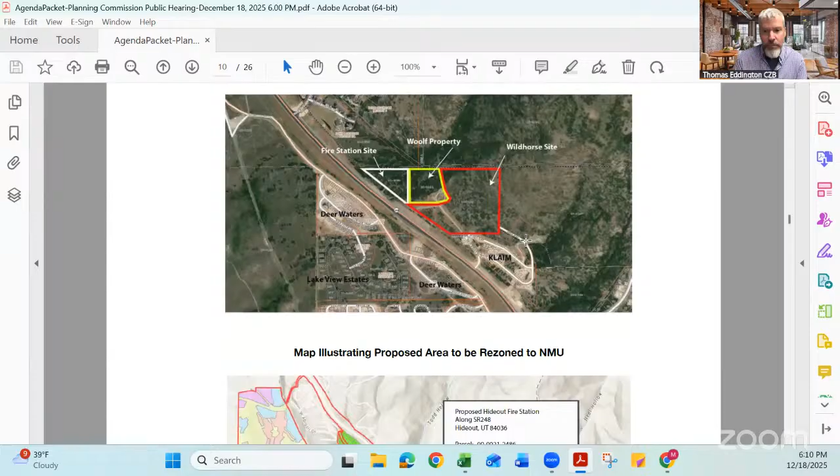If you go down just a little bit, you can see the site. You guys are probably very familiar with it by now. You can go down a little further, to the next page actually.

If we zone it NMU, neighborhood mixed use, it does list public services facility as a conditional use. So a fire station, a public works facility on maybe the south part of the triangle, if that materializes in the future, both would be conditional uses in an NMU. They would require a conditional use permit. So their site plan, their configuration layout, would still come back to you for approval, but they would be an allowed use subject to conditions that could mitigate any impacts. So the recommendation is NMU.

Is this project under the law that went into effect in January of 2025, where we'll get to see everything? And it won't go to council? Yes, you are correct. Conditional use permits only come to the planning commission and they don't go to council. So once the fire station comes in for the CUP, that will be presented to you, the planning commission, and you guys will have the final vote on that. After that, there is no additional stop. The conditional use permit is approved by the planning commission.

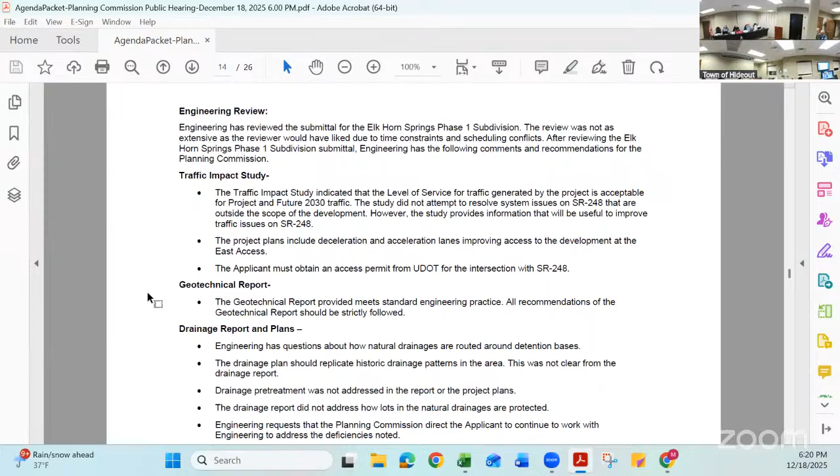Okay, because this is our first one, I just want to make sure that we're... make sure what's supposed to be included, what's not technically has to be included, etc. But should I let you continue, or should I keep asking my questions? No, whatever you prefer. I can give you a quick background for this subdivision if you want, and then if you have questions, that might be the right time, and then I can kind of walk you through as best an amateur engineer that I will play tonight can do in place of Dennis.

I'll walk you through very quickly. I think you guys are intimately familiar with the Elk Horn project, having just seen it a few months back, and then of course it went through town council for the rezone and the associated MDA.

So this is for phase 1 of Elk Horn. It's 8.971 acres. The zoning contained within this is R3 residential, R6 residential, and NMU, neighborhood mixed use, on that corner.

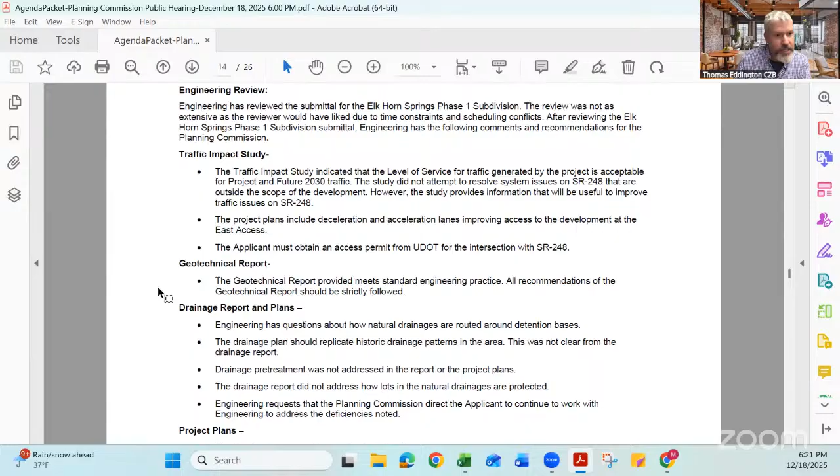If you're able to scroll down to the next report, Maria, it might be easier to go to the second page of my report. The aerial might help people visualize. You remember that area on the bottom right below the parking lot is the NMU area, reserved for commercial down the road.

Where is it? Can you give me annotation capability, Maria? Aren't those the black lines? No, not over there. Right there, that box. Go up, straight up, to the right. That little black box—go down, go left a little more, into the box. Right in the box, that's NMU.

That is the area that was reserved. If you remember, there were discussions early on about maybe a little more commercial to the left of what you see, incorporated around the pickleball court. As it moved through the process, there were questions about whether that was a good location for commercial. It went back and forth. Ultimately, Nate agreed to reserve some land for commercial—about 14,000 square feet, maybe increased slightly, which is where Maria's pointer is now. That is for Nate to develop commercial. If it doesn't develop as commercial, the MDA has a reversion clause so that land reverts to the town, and the town could try to collaborate with a partner to do commercial there or otherwise.

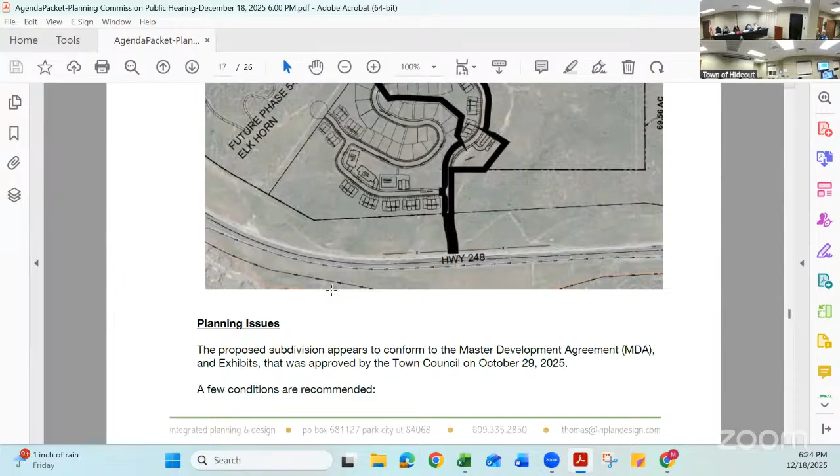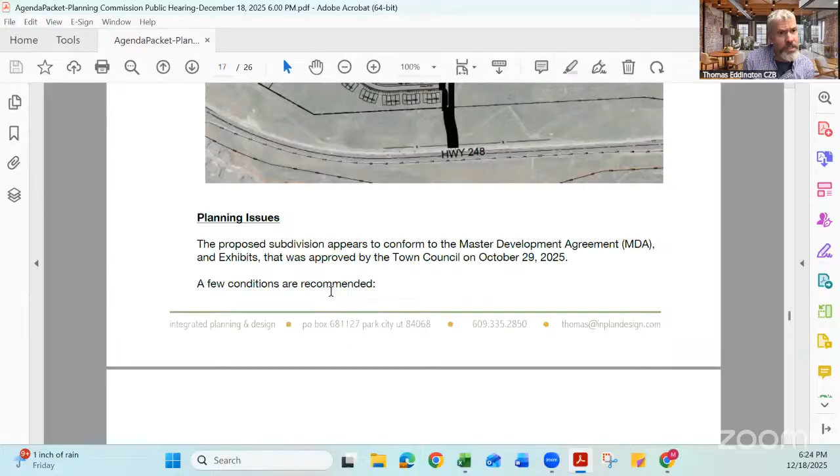This is the spine road that goes up—it's the emergency ingress/egress road for Golden Eagle, which would be improved as part of phase 1. There are also townhouses on the north, or west side, and some single family lots, in addition to the commercial area and the parking.

This meets exactly what we saw in the MDA deliverables. We had a few conditions we'd recommend: noting on the plat clearly where the stairways are located in this area, also noting the width of the stairways, possibly by way of a plat note, so any prospective buyers know what that open space is.

A note that the driveway serving each townhouse will be separated by landscaping so it's not all one concrete pad coming off the main spine road up to the top of this project. And then including the open space noted in Exhibit K of the MDA as native and undisturbed, meaning that land is not touched and remains undisturbed. Other than that, from a planning perspective, this is in compliance with the MDA and the rezone.

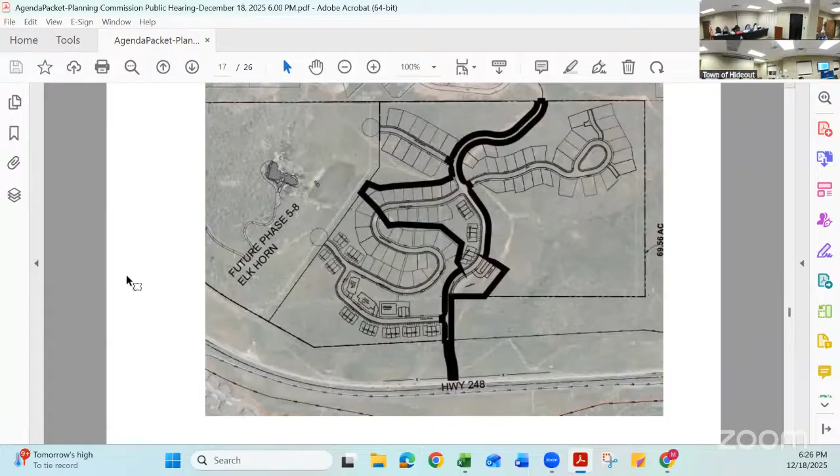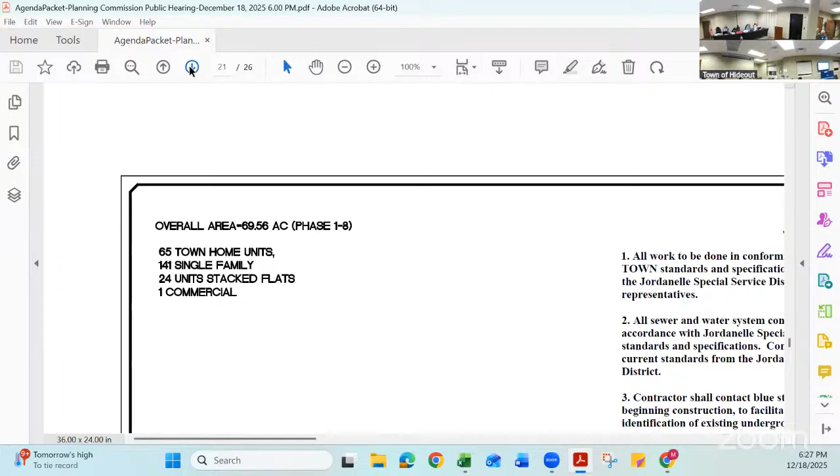I have a question just looking at page 22 of the packet. Where this road connects next to the Mustang development going out towards 248, it's half a road, it looks like the road's cut off about 10 feet - the width of the road is cut off. Are you going around the Mustang development? And are you proposing that the road be narrower at the exit?

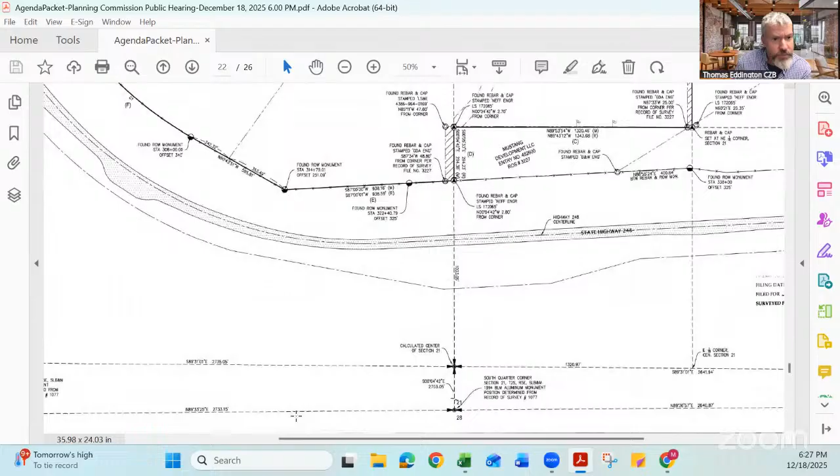Our entrance - Maria, stop right there and scroll down just a little bit. Actually, the other way, sorry. Look on slide 26. You could kind of see at the top of the screen, is that what you're talking about, Joel? Right dead center of the screen, where the cross hatching is. Yeah, if you go to slide 26, it shows you there, that's better.

It's 10 feet short on Mustang. Oh yeah, like that was about... go ahead. Really?

So the asphalt is exactly the same, and on our side of the road we've given the right of way. So we're proposing that Bob gives his portion - we've given our right of way all the way over to Bob's property, and when Bob comes in and develops, he would give his. We're giving up to the curb and gutter, then he would give after the curb and gutter the public utility easement, which is either 6 or 10 feet. The asphalt meets your guys's requirements, but there would be no easement on that side until Mustang wanted to develop.

So the sewer must be on the other side? Sewer's in the road - in the middle of the road. I don't know if it's actually in the middle, but it's in the road. Okay.

Is that maybe what Dennis was talking about under his concerns with the roadways? I have not seen the report, but we've met with Dennis several times, and this is the conclusion he thought would be best. Do we need to have him waive it?

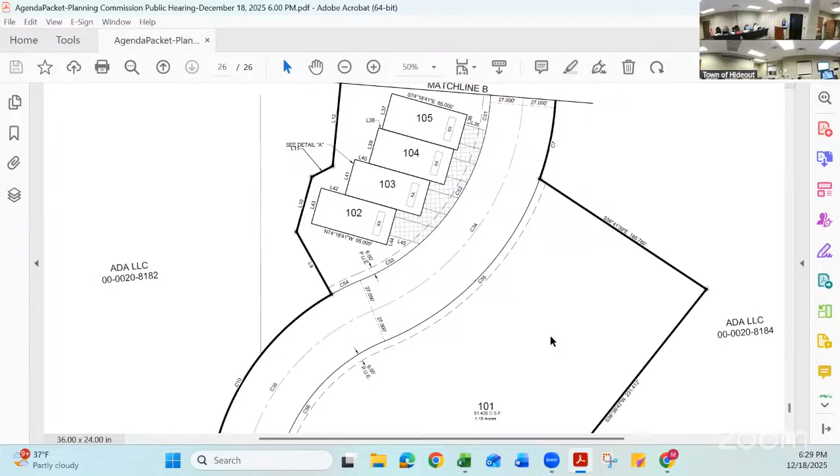He said he didn't get the report, the staff reports. Did you not receive them or just not have a chance to look at them? I received them, I didn't see them. It's fine, I've talked with Dennis and Thomas several times about this. So you have a right to have it - no, we need to get to a vote tonight, so that's fine, I waive whatever rights I have. Sorry, just a technicality. It's all fine, no, this is great.

We've worked with staff, Thomas and Dennis, for the last month. We turned this in on the 19th of November, and we've been working with them since. Our understanding is you guys would vote on this, and then we'd go back and fix anything with staff that they wanted fixed. So I really didn't even think there was a staff report, and I'm not concerned about it because we'll address that over the next couple months before we record the plat, if we get a positive recommendation.

The rest of the roadway is 27 and 27, and 54. And remind me what I get for the 54 feet? Paul, how many - you mean asphalt? Yes, how many feet of asphalt in the 54 feet? Yeah, we're basically building the whole road, including curb and gutter on both sides.

The only thing we're missing is the side treatment on Bob Martino's side. But the question is, how many feet of asphalt did they get for the 54-foot right of way? Oh, give me 2 seconds and I can answer that. We're following the city standard. I just couldn't remember. And the reason is, because it looks like all the driveways to the little townhomes are short - it's 30 feet of asphalt. Yes, 30 feet of asphalt.

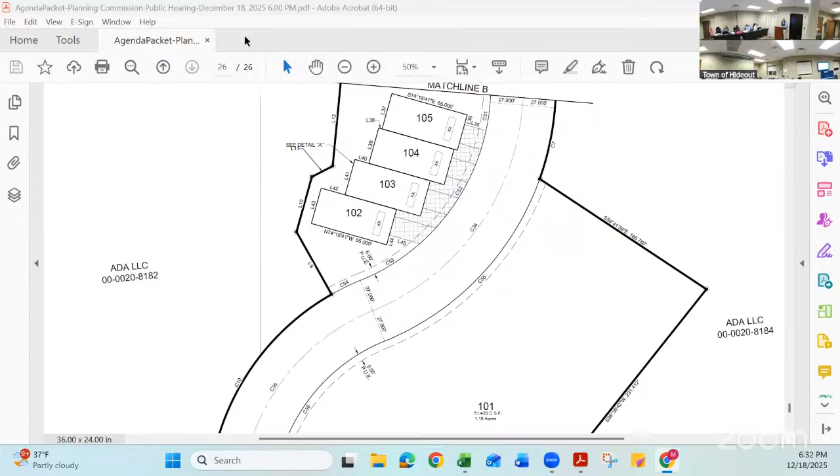If you scroll down to page U-1, you'll see all the stuff that answers the questions you've been asking about where the sewer line is, where the curb and gutter is. We don't know. Yeah, we don't have to.

Paul, is there any concern? What sheet page is that again? There's like 70 pages in this set of drawings, and it's called page U-1. Do you have it up by chance? I've got it up on my screen. Maria, can he share?

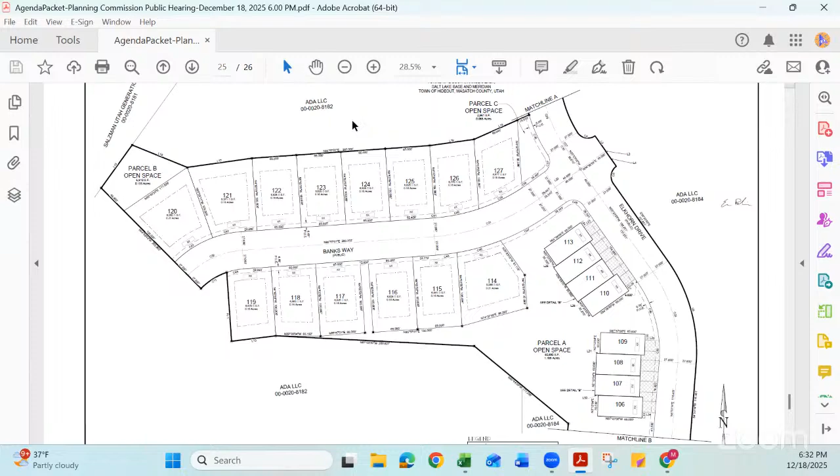State law says you have to have center line of road plus 10 feet. Yeah, so we're going beyond that. Okay, keep that in mind. We're kind of having side conversations, but for the sake of the minutes and the recording, if we can just take turns. Go ahead, Paul, I know it's hard because you're not in the room.

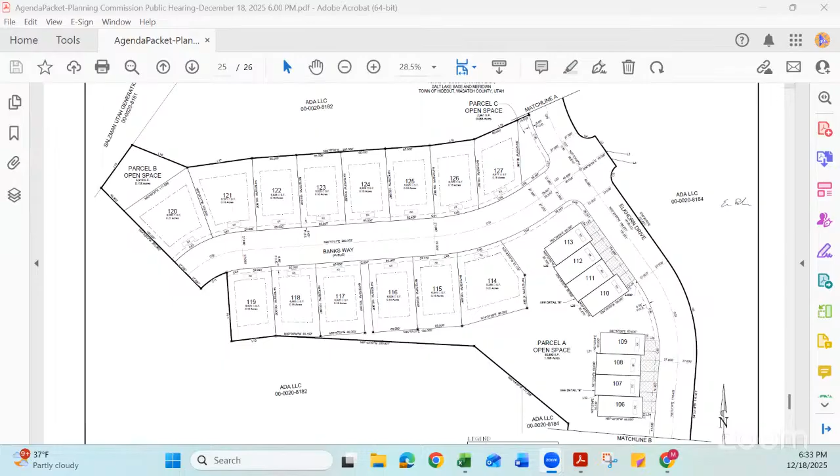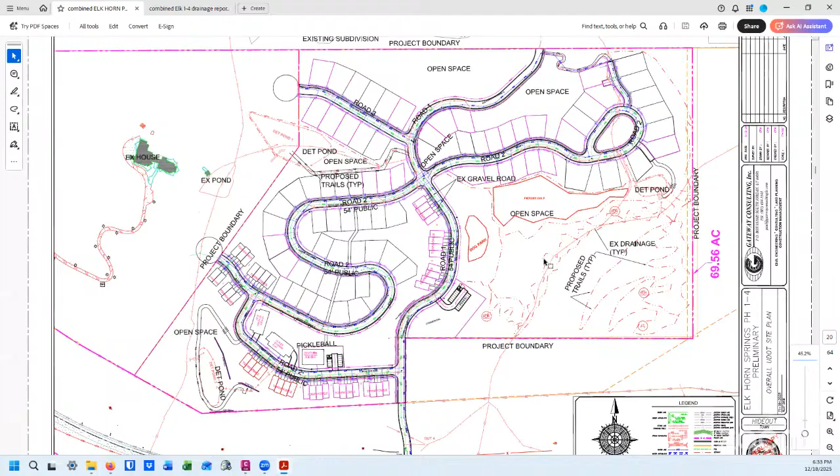Okay, so this is page U-1. Like I said, there's about 70 pages in this whole set of drawings. So let me scroll down. Here's the sewer in green coming down to the road. Black is your curb and gutter. Pink is your property line. So we're building curb and gutter, all the asphalt, curb and gutter, the trail, the dry utilities, everything else on the other side. The only thing not being built here is the side treatment, but you really don't have any side treatment over here anyway, so it's going to look just the same.

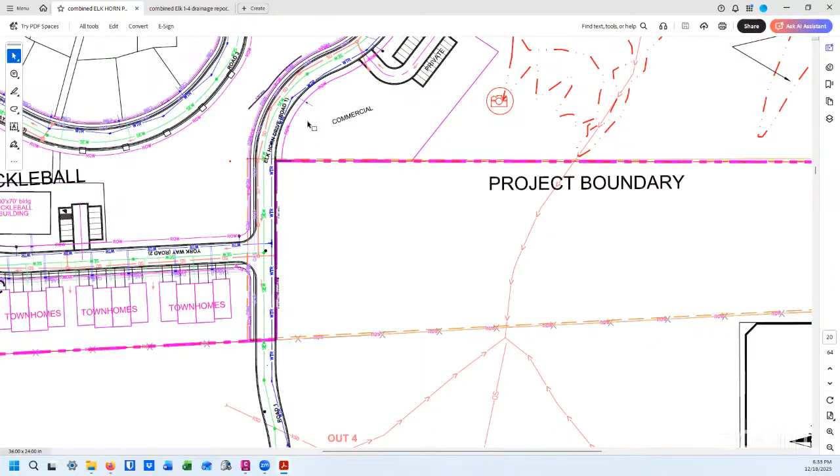How far is that first house from the street? Okay, so I'm going to stop sharing and pull up my other screen then. Let's see, the right of way or from the asphalt.

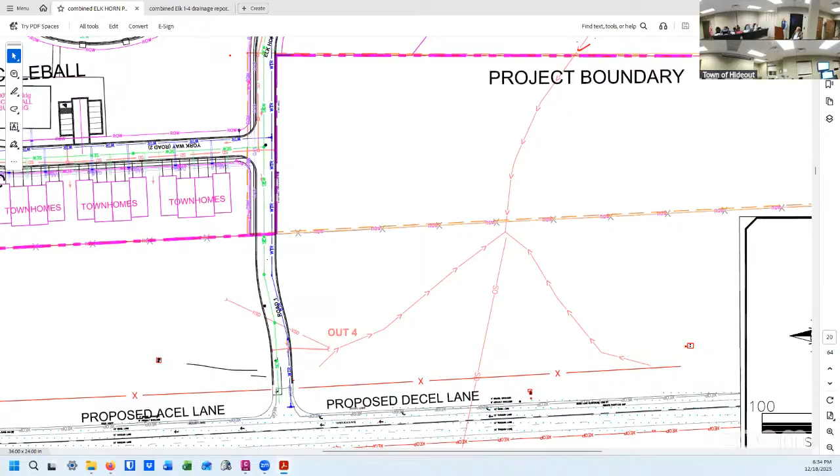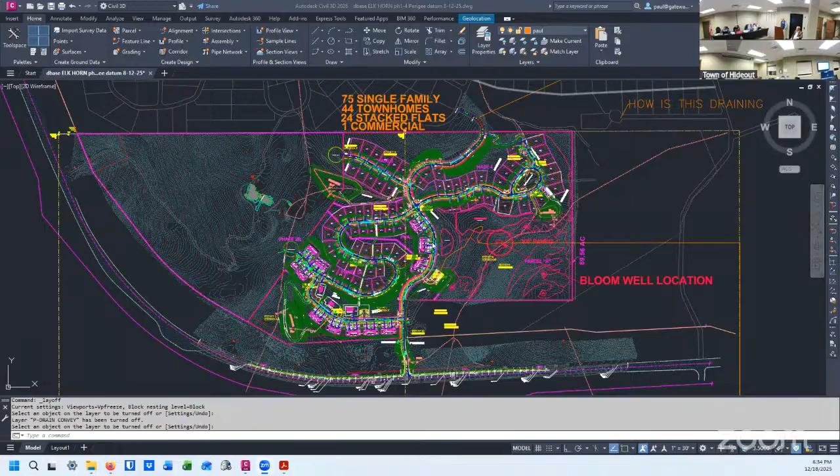You're talking from 248? Is that what you mean, 248? No, I meant the entrance. He just showed the houses. Right there, right there. But that's not part of phase one. He should have been, he was just showing the overall. Yeah, I just want to make sure about the road. I guess we can address it in the staking if they're too close.

Okay, so here is my CAD file. Now ask the question again. How close is the house to the road here? I can't see anything. And we can't see your file. It's phase two.

It's phase two, didn't she realize it was phase two she was concerned about? Can you see my screen now? No, not yet. I can. It took a little while. We see you, Thomas, but we don't see your screen.

Took a while, but if I'm answering the right question, the back of the townhomes to the edge of asphalt is about 320 feet to the UDOT asphalt.

Oh yeah, I think we got a little confused, because we're talking about phase two here. We don't need to worry about it, we're just on phase one, so that'll be a next end of the year type deal. Hopefully.

Okay Paul, can I ask one question? Yes. Is there any concern about the road going right up to the property line of the Mustang development? I have no idea, is there any legal concern of putting that road right up against it? No, I don't think that our code requires any setbacks for the roads. Are you talking about what's going to be the main kind of road all the way up?

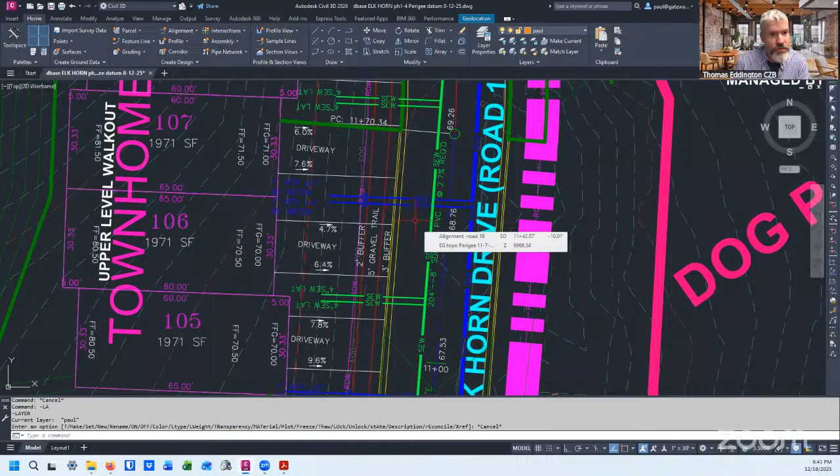That's a good question, but I think Nate is right. Every road has a trail, a crushed granite trail on one side of the road that's 5 feet wide at minimum. And there are cross trails throughout the property and some stairwells that go between different lots for connectivity.

The stairway, you can see it on here right now. It's between the 3 lots on the bottom part of the road. So that'll just be stairway and takes you down to the main park and everything. I know there was a question about how wide it is - we decided that was 20 feet. It said 12. No, it's 12. That's 12.

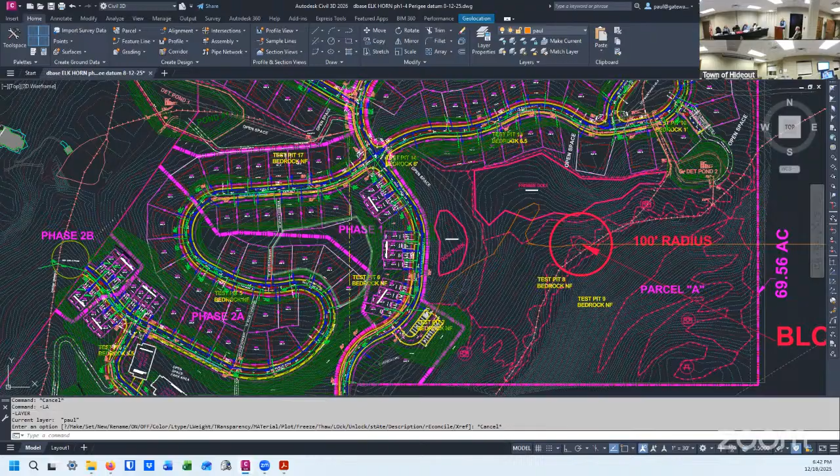Sorry, the stairway - yeah, it's in the development agreement, and the stairway is 12 feet wide. Dennis just asked that it be called out as a note on the plat. So like I said, if we get approved tonight, we'll work with staff to get all their recommendations done before they sign off on the final. We're just hoping to get it through tonight, and then we'll get all those things fixed, or whatever they want to see on the plat.

And just for clarification, with regard to this stairway, it's 12 feet of common area width, and the stairway itself will probably be like 5 or 6 feet wide, or whatever we end up accepting.

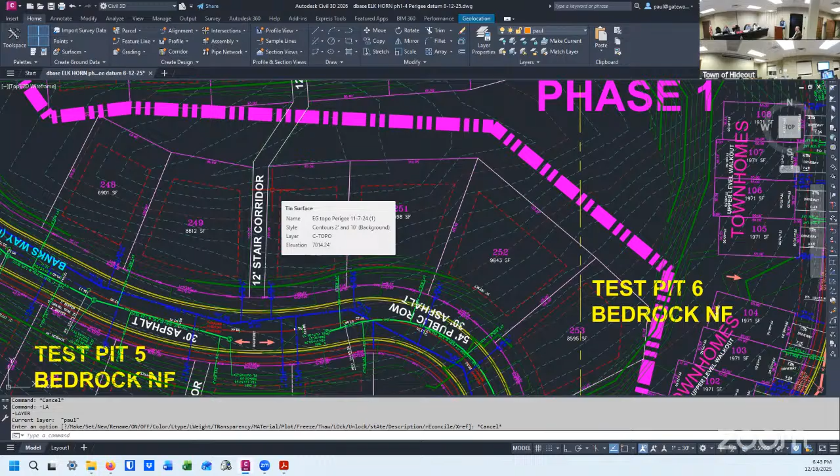I have a quick question since I think Brad mentioned the stop signs. Where does it come into play if we feel the need for stop signs, or somebody feels the need for stop signs? Is that with administration, not planning commission? If you guys have a recommendation, you can certainly make it, but ultimately that would be at time of the town engineer reviewing the final subdivision. That's not your last shot at that issue though - if there is an issue that the town engineer or the council observes once a project is developed, they can certainly request further exploration and signage if needed.

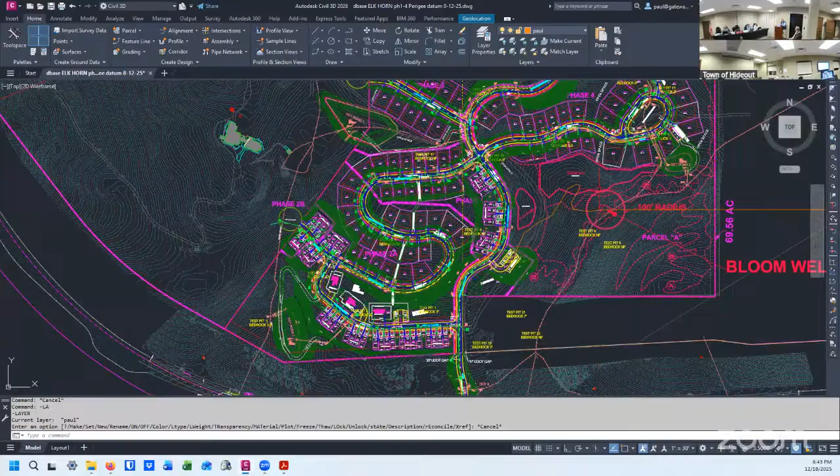Just for example, we added a sign in Deer Waters 4 years later - we got a sign up there probably 4 months ago because someone said this needs to be a stop sign. We did that. In Deer Springs, there was a blind spot, so I had my son, who just started a construction company, come up and we cut that down about 8 feet. Some developers won't do it, but I'll do it every single time and come fix those things we're not aware of.

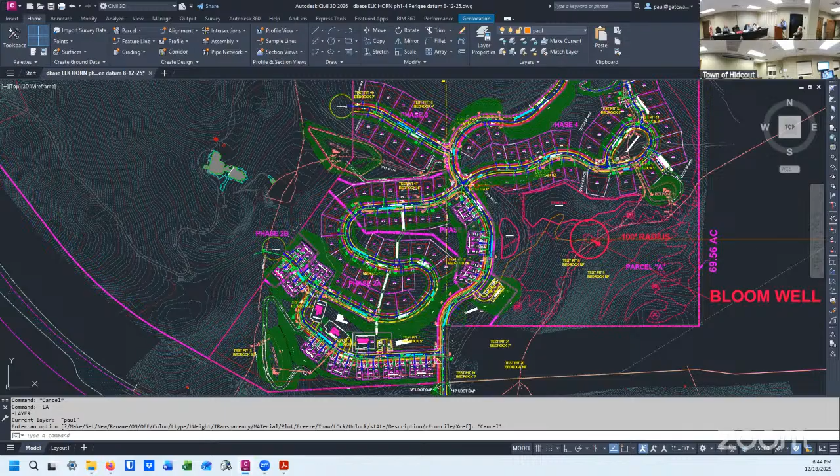There may be a traffic sign or something you guys want to see. You have my word on that, and I believe that you'll do it. I just needed clarification as to when, where, and who handles this.

With this new code, the state code, this is my first time coming to you guys one time and not going to town council. I kind of like it because town council likes to go till like 11 o'clock at night, but mostly because of my stuff. So this is the change that's been made and we live by it.

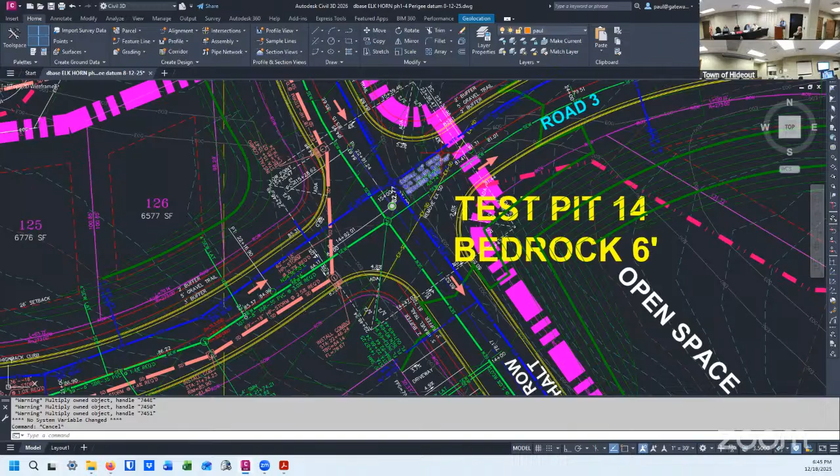I can show you all the stop signs if you want. The short answer is any of the roads coming into the spine road has a stop sign, but as of right now, the spine road is continuous drive-through. If you want me to add more stop signs, like at this intersection, and add 2 more at this intersection and have them stop, I'm glad to do that.

I don't know if it'd be smart to put in speed bumps. Since you're going to have all the construction ending up going down that spine road, those people in the townhomes are going to have a lot of dump trucks go by or whatever. I know Bob Martino does not want to use the spine road, even though that's his second access.

So maybe it won't be as busy as we think. Does the speed limit, when does it get established? Are you talking about the sign? No, the actual speed limit. Like, how do you know?

Whatever your code is. We're following the code right now for a 30-mile design speed, but if you want me to drop it down to 20, I'm glad to do that.

Then you have to look at the code. He said it's 25, but he's happy to drop it to 20. Oh, I think he said 30. I think it's just 30. I think it's 30 right now, but Paul, you said you'd drop it if requested. Yeah, if you guys want it dropped, I'd be really happy to drop it. Yes, please.

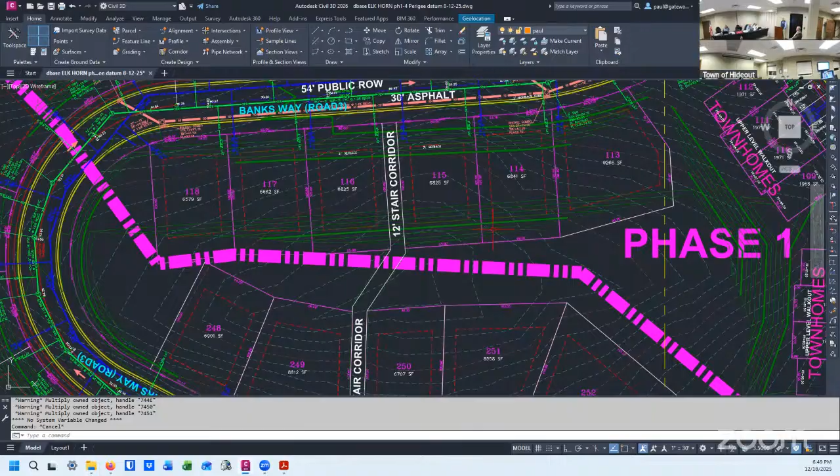That's how I've got it platted, as open space. So this is the same as all of this. You are correct, Brad, and you are correct, Paul. It doesn't need to be dedicated specifically as an easement.

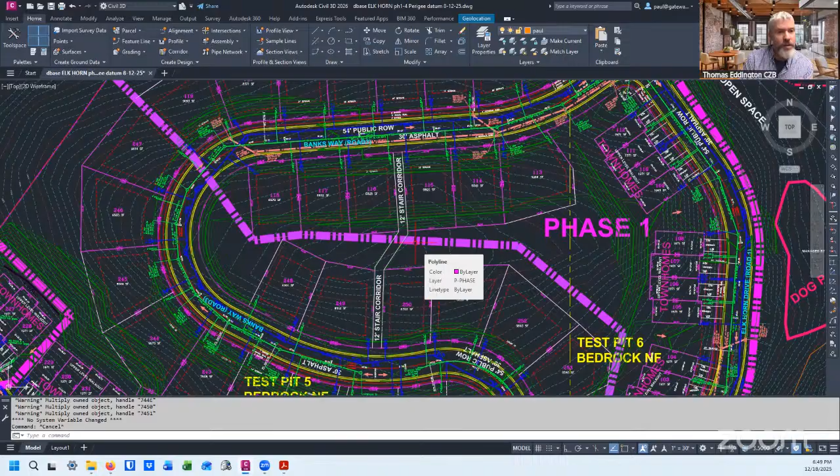Typically, what we do with the open space on the plats is require the open space be dedicated as public utility easements, or I'm sorry, public access easements for trails, depending where they may go. So that typically gets incorporated into the open space so that there is flexibility to move them if needed. I'm happy to add that in there if that's what you want. And that's typically what we've done in Lakeview and in the other subdivisions, just so that if the trail moves, the public has the right to access it.

Okay. Well, who will hold the open space? Will it be the HOA? Yes, the HOA.

Is there going to be one HOA? Yes. For the whole phase, or just one? The whole thing.

There's one caveat to that: under Utah law, condominiums have to have their own HOA. We do have stacks of flats, so you'll have a separate HOA for those. They'll be their own HOA by statute. Will they also be part of the development HOA, or will they be totally independent? They'll just be their own now. You could have joint use agreements if you're sharing some amenity, but by state law they have to be separate.

Why don't you stand up and introduce yourself? I don't know, you guys know Eric?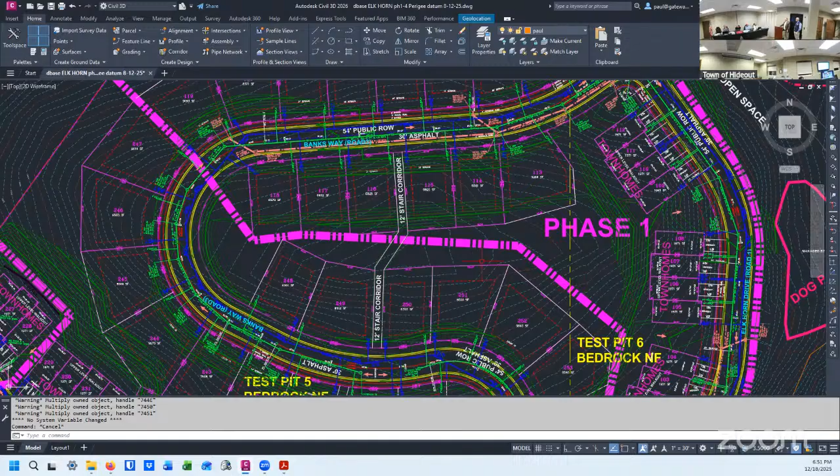My name is Eric Davenport, I'm general counsel for Home Zones. Utah code has an entire section on condominiums, and HOAs relate to condominiums differently. The property is held differently than a townhome. Condominium owners all own an indivisible share of the common area, typically based upon the number of units or the square footage of their units. Whereas with a townhome association, the actual homeowners association will own the common area.

They're going to use the pickleball courts and so on. What you'd typically do in that situation is have a joint use agreement between the condominium association and the townhome association. We do it all the time, working out the costs—say we have 30 members and you have 10, so we'll pay three-quarters of it, you pay that. I think that's in our phase 3 or 4, I don't remember, but it's down the road a little bit on those.

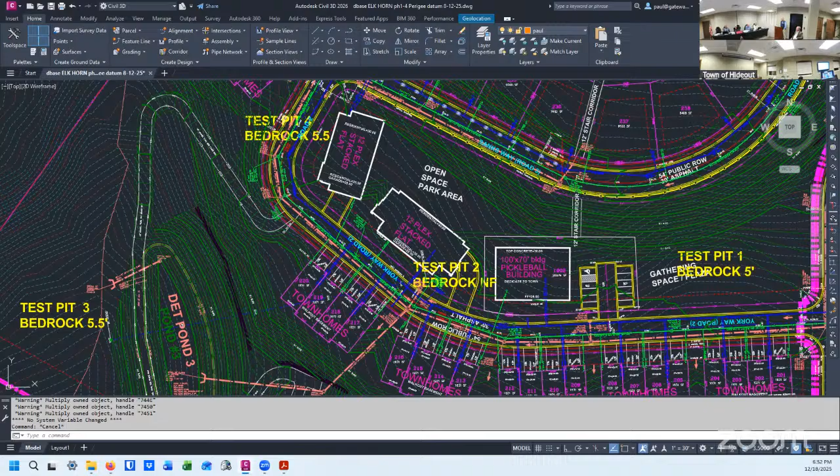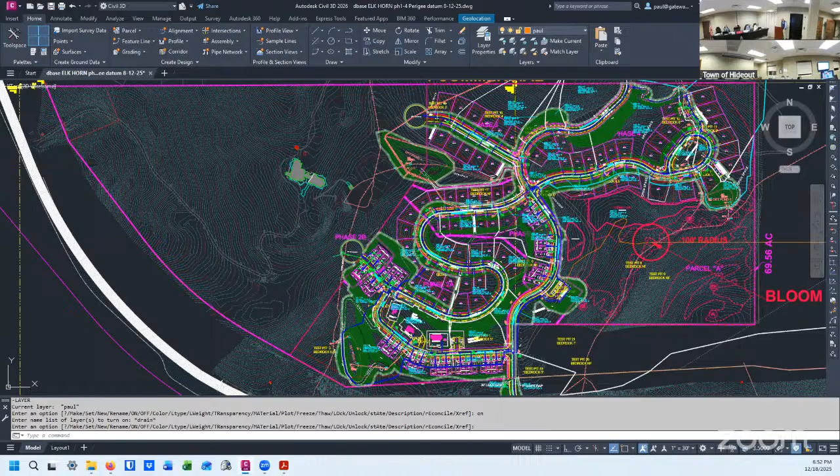There were a couple items in the report, if you didn't see it, that I want to bring to your attention. Engineering had questions about natural drainages—the drainage plan should replicate historic drainage patterns in the area. Paul, will you address that? Also, drainage pre-treatment wasn't addressed in the report or project plans, and the drainage report didn't address how lots and natural drainages are protected. Our engineering team asked that we ask you to continue working with engineering to address these deficiencies.

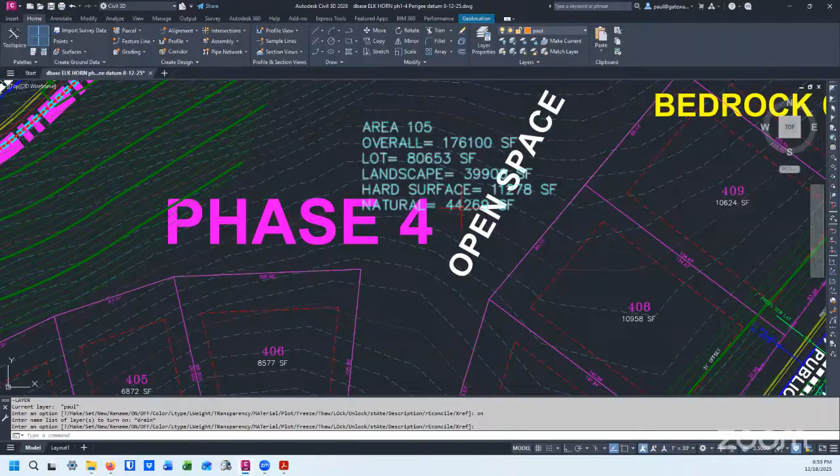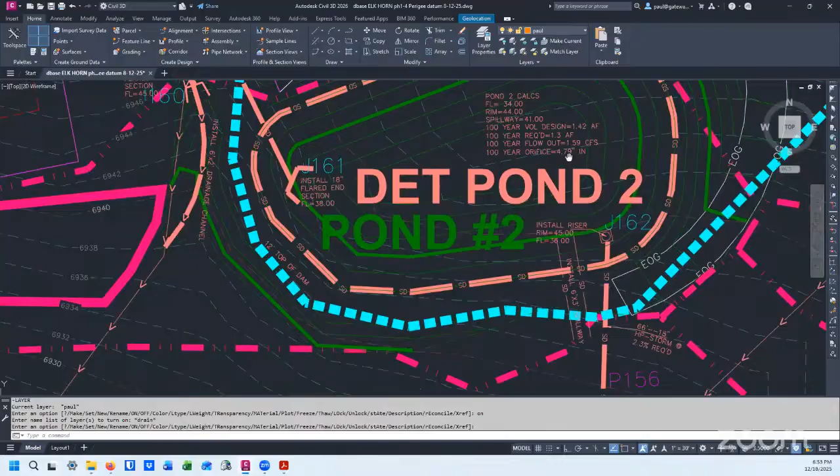Yeah, I'm happy to work with them. Basically, all of our hard surface area—roads and everything else—goes into our detention basin. Out of every catch basin we have, we calculate a drainage area: how much is landscape, how much is hard surface, how much is natural, and so on. Everything we're generating runs through the detention basins, so our pre-treatment happens there, and the historical flows are just routed around us through a channel. We're not dumping any of our stuff in until after it's been treated for 24 hours, so you'll see these orifices that are really small, 4.79 inches.

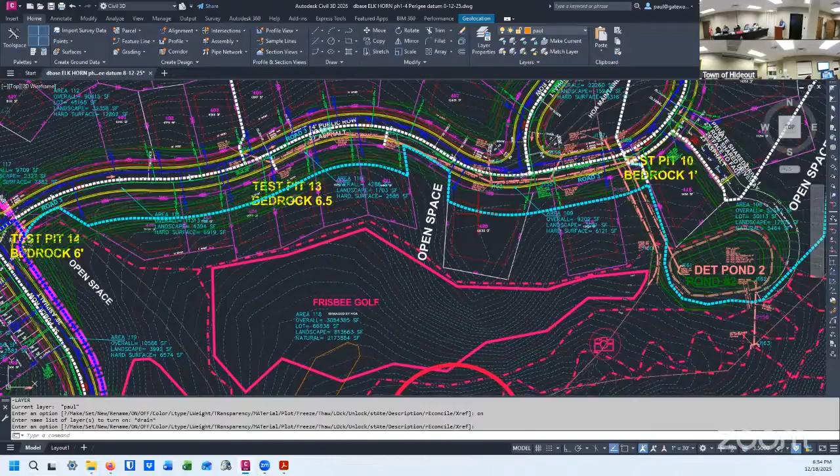Paul, are you sharing your screen? I believe I am. Mine says I'm sharing. Maria, I think you might need to click the top tab that says Paul's screen on your Zoom, because you might just be seeing what you were sharing. Do you see that? There's a tab at the top of your Zoom screen, green and red. Oh right here, sorry, yeah. I'm toggling my own tabs so I can see it, but I don't think you guys are seeing the right screen. There it is, see it? Sorry about that, thank you.

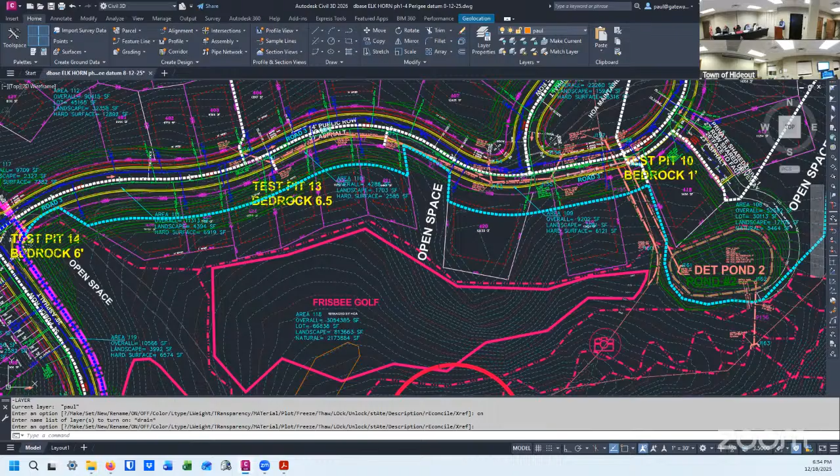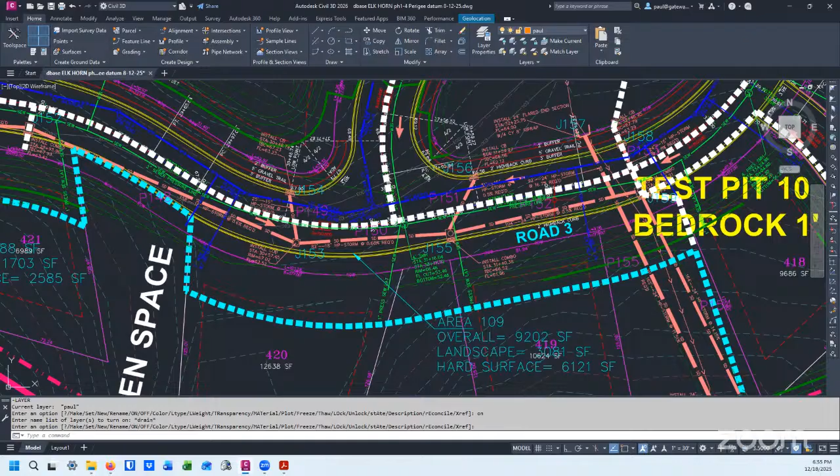Why don't you start over, because this is important with the drainage. Okay, so every drainage area or catch basin has a drainage area that we figure out—overall square footage, how much is landscape area, how much is hard surface area. We size all of our pipes to handle a 100-year storm at 80% capacity, so we're above what they require. Out of all those hard surface areas, we run it through a HEC model and then through our detention basin.

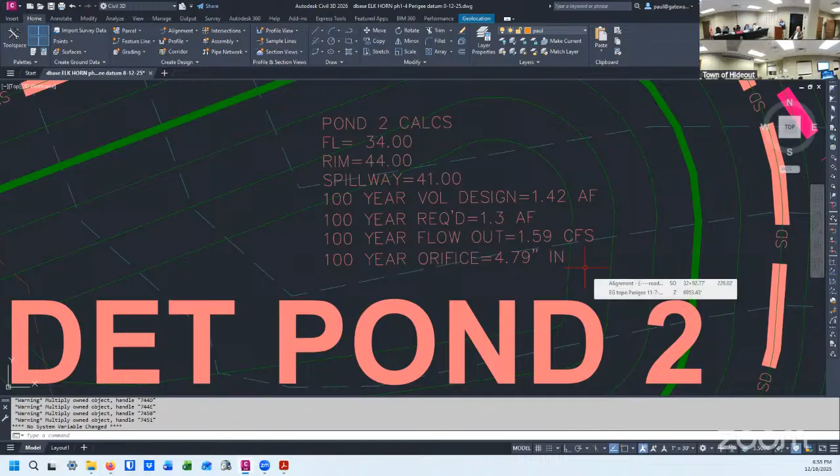So our pre-treatment is done in the detention basin. We hold our entire subdivision's runoff in the detention basin for 24 hours and let it go. That's why our orifices are so small. The entire drainage area goes into this basin, but I only have a 4.79 inch orifice to allow it out. That allows the silts to separate out over 24 hours. I could go over all this with Dennis as well, but just so you know, your question was whether we're dumping water into the existing drainages that are there now - not until it goes through our pond and gets cleaned up, and then it goes into it. Yes.

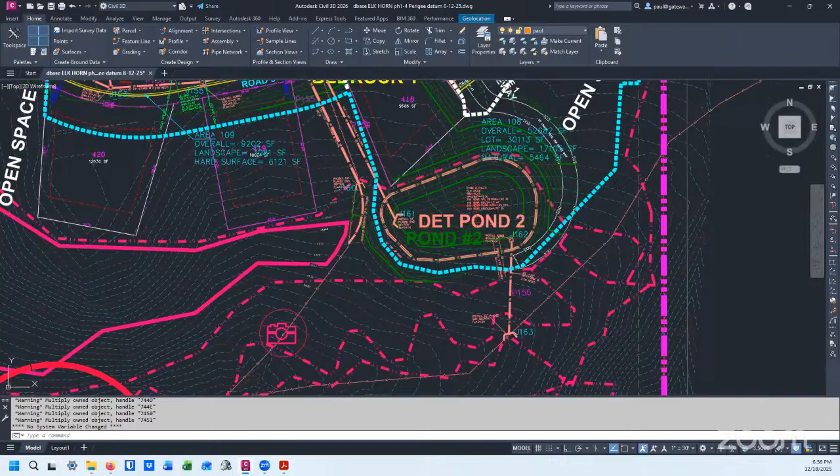So if you had 10 CFS going into this drainage channel before, we have like 0.1 CFS because we throttle everything down as part of the Clean Water Act. And then, like I said, it's released over 24 hours. So a storm comes through and it's already passed way before any of my water is really going into this channel.

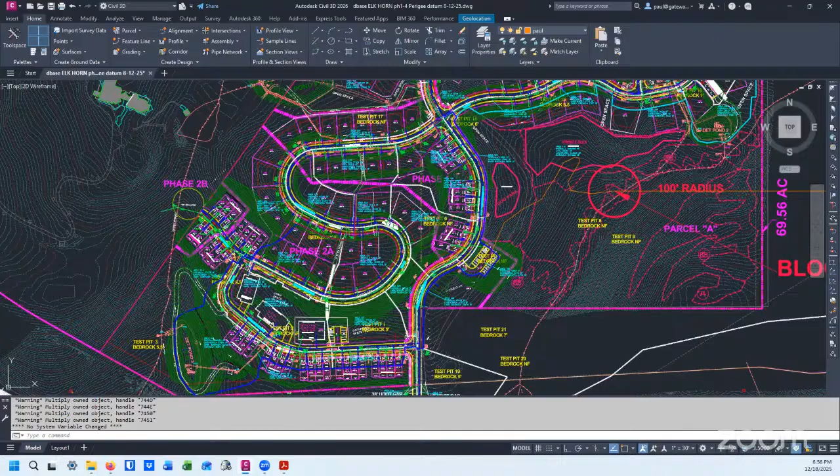Paul, will you have a detention pond built as part of phase one? We have to build a lot of the detention basins because our detention basin on phase one is way over here, so we have a lot of offsite stuff in phase one. Our phase one comes down the road, but yeah, we have to build our detention basins. So it goes, phase over to one - that left, it goes over to that left pond.

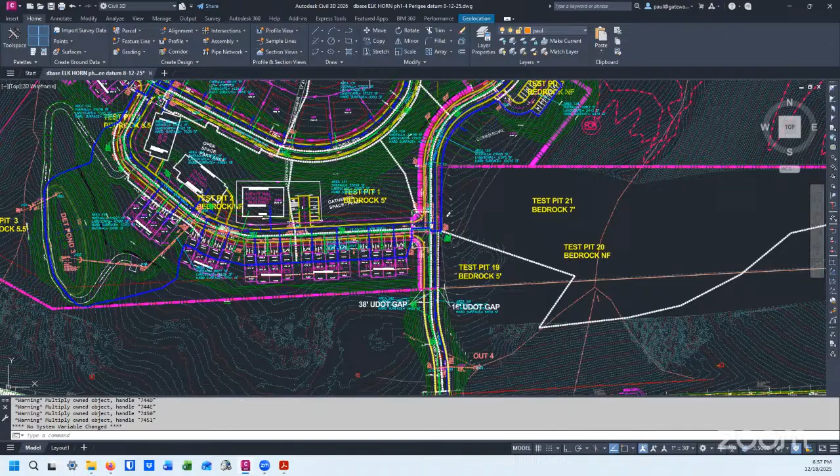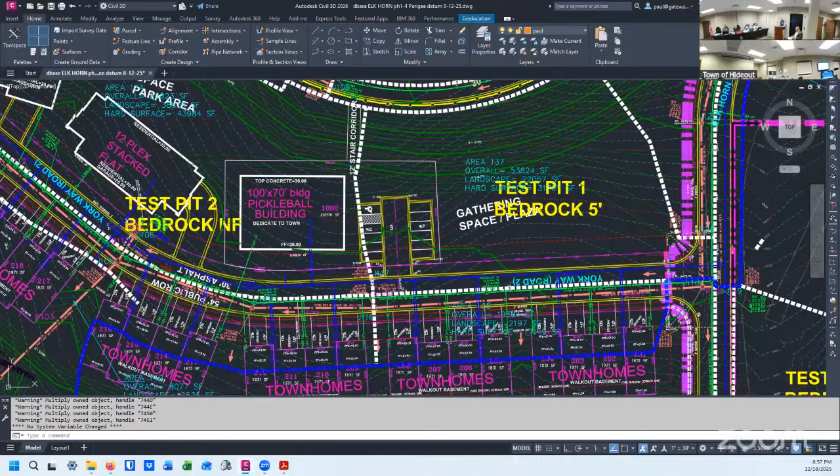One of the things we'll want to do then is make sure you guys provide us a plan that shows the estimated limits of disturbance, because it'll be outside of phase one, what's illustrated on the subdivision, right? Because that's well outside of phase one, right? Yes, phase one is this pink line right through here, this thick line. So we would want to see that, and we would want to see the limits of disturbance kept as de minimis as they can until that phase comes through for construction.

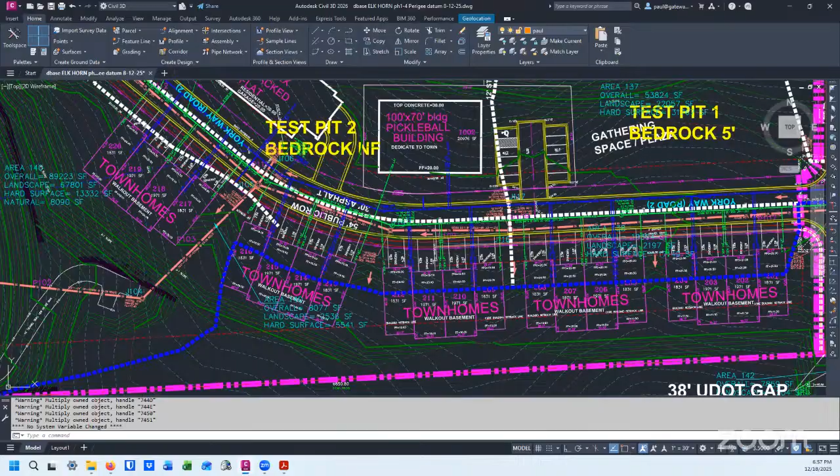Does that make sense? Yes, but we want to put the pipe in only once, so we've got the elevations and where everything goes. So I agree, we want to keep the disturbance as little as possible until a future phase. Right, but we don't want to be building multiple detention basins and then moving them when another phase comes online.

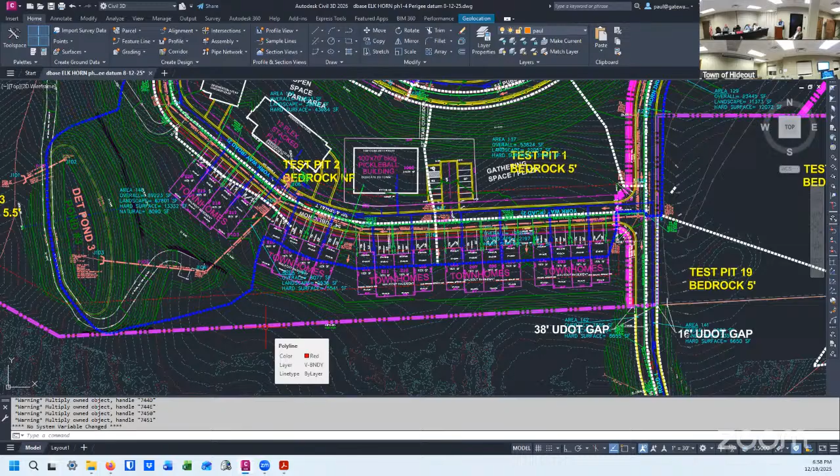No, that makes sense. Well Paul, when you turned in your limits of disturbance, was that included in that? Do they already have that in their packet to Dennis? I believe it did. Okay. And did you, Paul, get Dennis's staff review?

I did not. So one of the things I think I should do is maybe share my screen, or Maria, you go back to yours, because I do want to walk through a couple of things that Dennis did ask me to share with you all. Maria, can you pull up the packet again? Just so that you guys see his report - you probably have it in your email or the link, but just so you're aware.

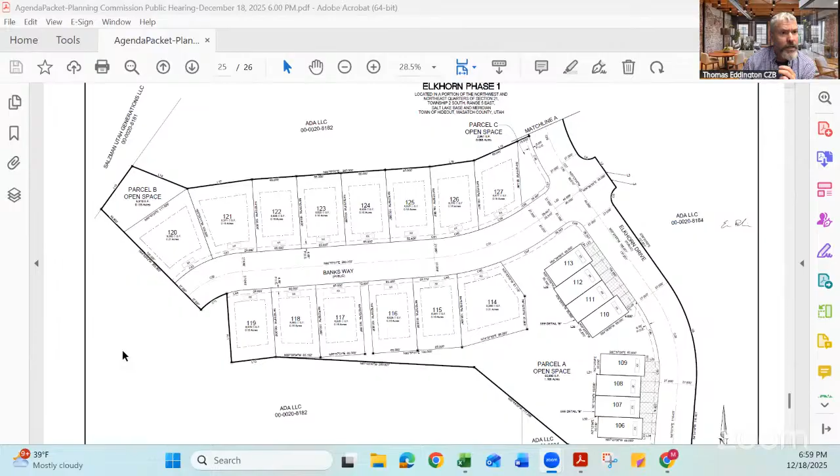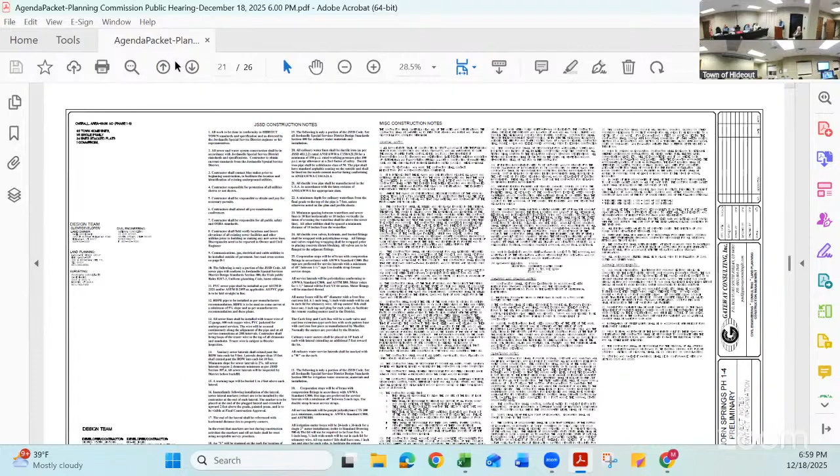Okay, if you can scroll up, it'll be at the top of my report. You've probably got another 10 pages to go. Let's see if I know what page it's on. I can share my report if you guys want to see that now. It's right there, Maria, if you zoom in there. That's just what I was reading - yeah, that's what Joel read out. So Joel read the drainage - the bolded text says drainage report and plans.

So we definitely want to make sure you work through that in detail to the town engineer's satisfaction for the drainage report. And the top one, traffic impact study - the applicant must obtain an access permit from UDOT for the intersection with 248.

And again, everybody understands this is a right out and a right in only, right? Everybody understands that is how this intersection will work until the light goes in up at Golden Eagle Road, at which point they'll be able to make a U-turn, but it'll still be right in, right out. It'll just be an easier opportunity for them to get into this development.

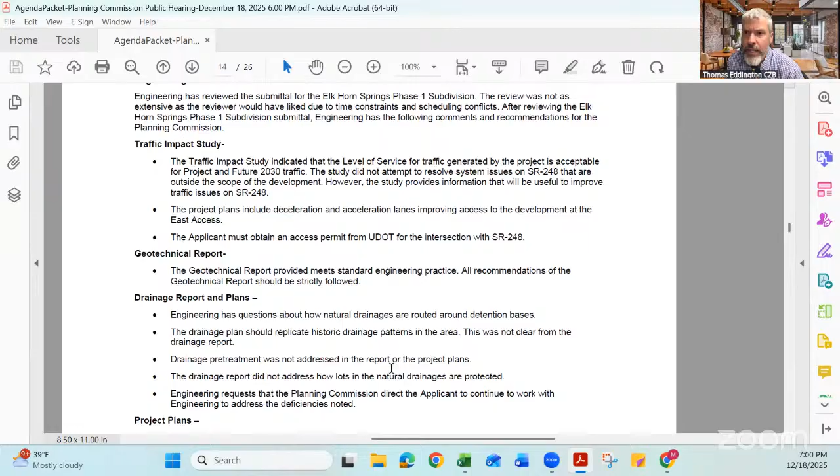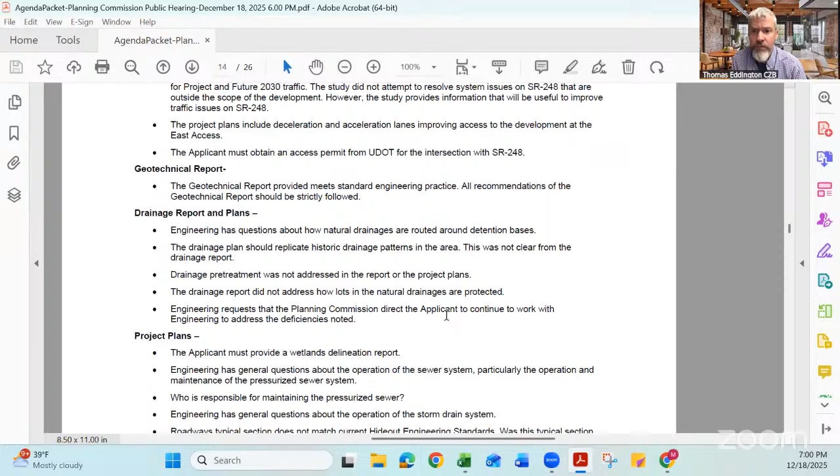Dennis noted that the geotech report met engineering practice. Then there were a couple of items he noted at the bottom where it says project plans - some additional material must be provided, a wetlands delineation report.

There were some questions that Dennis had about the operation of the sewer system that need to be resolved to his satisfaction. He questioned who's responsible for maintaining the pressurized sewer. Do you guys know? It's going to be JSSD, I believe. Okay, confirm that with him.

He had a couple more questions about the storm drain systems, and he noted that the roadway's typical section did not match current Hideout Engineering Standards. Was this typical section approved by the town and by the prior town engineer? I think this does meet the alternative standard, I think. So we'll want to confirm that with him.

I was thinking that was the entrance adjacent to the property line. I'm not sure what that is. I believe we are following the city standard for the roads. We have the two standards, and I thought you were following the alternative, but we can confirm that with him to ensure compliance.

And then as Joel noted, there was just a request to continue to work with the engineer based on the planning commission's direction to do so as a condition of approval.

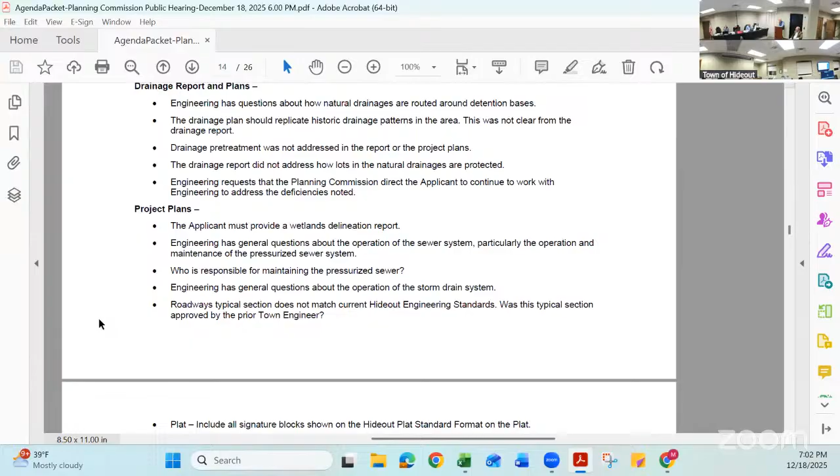Under the traffic impact study, that second bullet, the project plans include deceleration and acceleration lanes improving access, but I thought UDOT didn't give approval for that. Well, we will have approval for the accel-decel lane. What we do not have approval for is a left turn into it or out of it. So if you're driving west, you'll hit a decel lane and turn into the subdivision. Once you leave the subdivision, you'll turn right and have an accel lane to merge with traffic.

So even when the light goes in at Golden Eagle, people eastbound on 248 will still have to go up to Golden Eagle, stop at the light, make a U-turn, and then come back in. They still can't turn left into this main road, but they can turn left out of it once the light goes in - out of Golden Eagle, but not out of ours.

Now our second access, we're still working with UDOT on that, and that's our phase 4, 5 - that's five years down the road, but we're working on that now. That may be different at the existing driveway. We're hoping that gets a right in, right out, and left in. We hope all that, but we don't know that for sure.

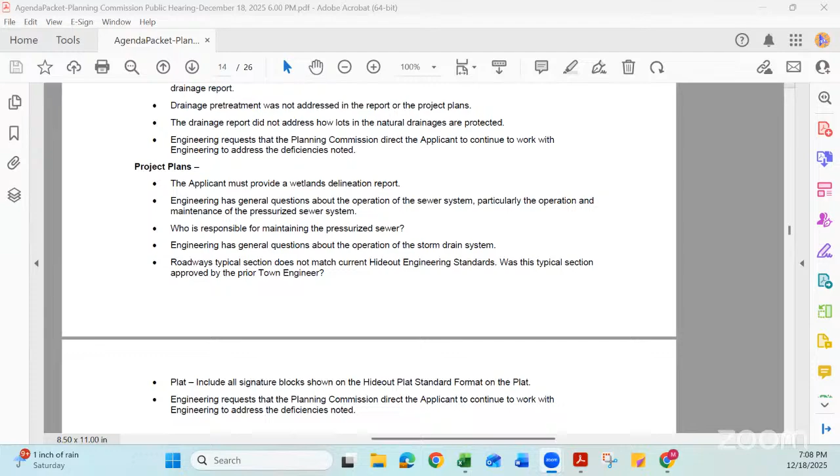And is that on the west side of your spine? Or east side? No, it's on the east side, a small piece on the east side in phase 1? Yes. Yeah, so we'll build a parking lot. The parking lot for now will be used for trails, dog park trails, but if we actually build something—say I have a restaurant that wants to come in—there's some nice views there, you can see it from the highway. That's why we decided to put it over there.

So if we can get a restaurant there, we may have to expand the commercial piece and the parking lot. We want to make sure we have enough parking for the trails, dog park, and the commercial piece. So that would be something we'd bring back to you once we know who's gonna go there.

You know, the commercial is much better after it gets built out up there, and Golden Eagle gets built out, Soaring Hawk gets built out, and Tuhaye continues to get built out. That's when that commercial piece is gonna be good. I don't know that I'll be building that in 5 years, but if someone comes in, we'll have signs up there, we'll advertise it, put it with a commercial agent. If we can get someone in there, we'll build it. If not, we will give it over to the town, and that piece will just get better over time with more homes being sold.

I promised last question, because none of our drawings show it: guest parking spots for the houses. Paul, will you address that? Ask that question again. What is how many guest parking spots do you have for the area if you exclude the commercial? Well, so for example, every townhome has 2 in the garage, 2 in front of the garage.

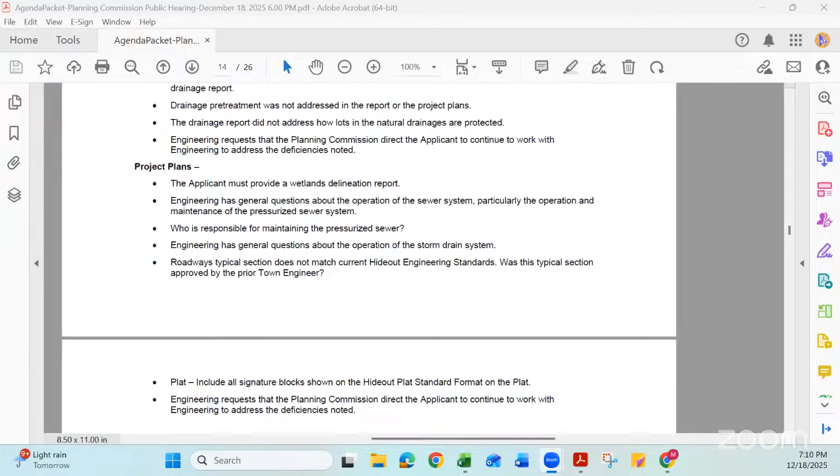I could put some more parking in there if that's what you guys would like. There are some places, I know, like right there. Let us look at that, we'll just make a recommendation. We'll look at that because every time I drive through Deer Waters, or mainly Deer Waters and Deer Springs, they're being used, so I think it's a good idea to have them.

It is, we have none, and if somebody has three families over with two cars in the driveway, there's no place else to park. I think it's a good idea. Deer Waters, you did a good job putting that on the map. If you could look at that, that would be great. I didn't know we didn't have that, and it's also a good place to put snow if you have huge snowstorms.

We do have places to put snow anyway, but I like the idea of having parking, so make that one of your recommendations. It's also nice to put it by the mailbox, if possible.

Are the mailbox locations something that would be put on Phase one here right now? Certainly is, yeah. Can it be near parking? Because I frequently park my car, get out to open my mailbox, and I don't want to block the road. We'll look at that. So maybe by commercial, perhaps to drive more people to the commercial area.

That's a great comment, I actually did not know we didn't have parking. Yeah, right there, that's what I was thinking too. It's nice that all you guys live here because you notice things that we don't as developers, and I appreciate that.